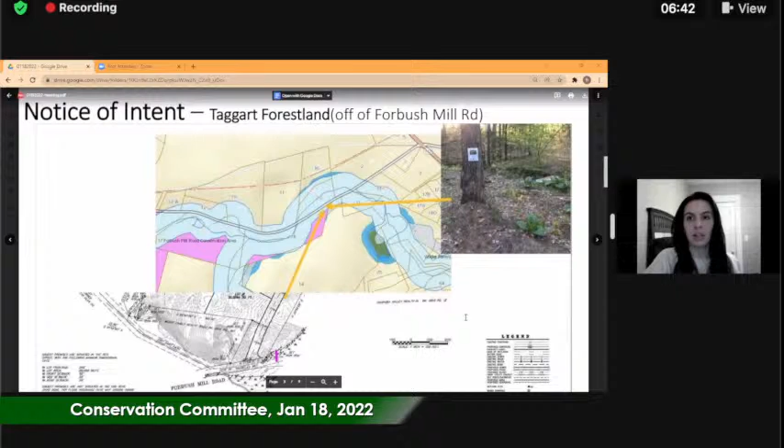Rebecca, do you want to give us a quick overview or reminder of this? Sure. So this is the property that the town had recently acquired. Currently, there is technically not an access through the frontage aside from up a very steep slope. So rather than going up the frontage here, at Taggart, there is this lower area that does cross bordering vegetated wetland, but it's a much more gradual route. There's actually an existing cart path on the opposite side that connects to the loop trail, which is an existing cart path, or it's not a loop trail yet.

This access here is shown in this image. This is what exists. This sign has actually been removed. And as you can see, there is obviously skunk cabbage and some additional wetland vegetation in here.

It's almost like a formed gully from drainage along the roadway. It's across the road from the perennial stream, so we're in that outer riparian area. This board was put here very temporarily for the ribbon cutting ceremony to access into the Taggart property.

That obviously needs to be replaced with something that is acceptable and permitted. The proposal currently is to replace that with one of our footbridges that we typically see on other conservation parcels. In addition, in this proposal we are also looking to...

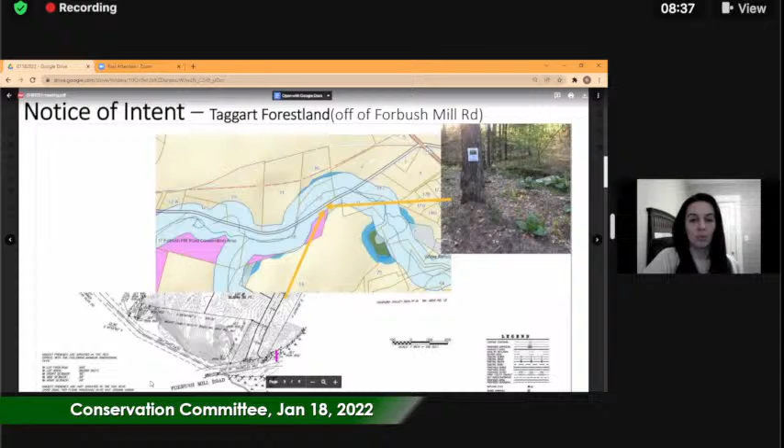I'm sorry, that just disappeared on me. We are also looking to put in 2 gravel parking spaces if 2 will fit, otherwise it will just be 1. And this is just some light grading along the road shoulder there.

I'm just trying to pull this up again. But I did speak to the DPW director. He does not see this as an issue because there's already some riprap and gravel along the side of the road shoulder just before that skunk cabbage. I'm going to share my screen again.

So here where this pink line is, you can see that's actually where the crossing is. So it crosses that bordering vegetated wetland. This parcel here is the existing single family home. And this, where it shows a roadway or subdivision roadway going in, that's actually right next to the very steep slope and was from a prior proposal for this parcel before the town acquired it.

But this was just for the purposes of showing the topography, the wetland resource areas, where this is leading into the property. It's a conservation property for passive recreation purposes, and to access that use, it may be considered a limited project, or the commission has the ability to view it as a minor project.

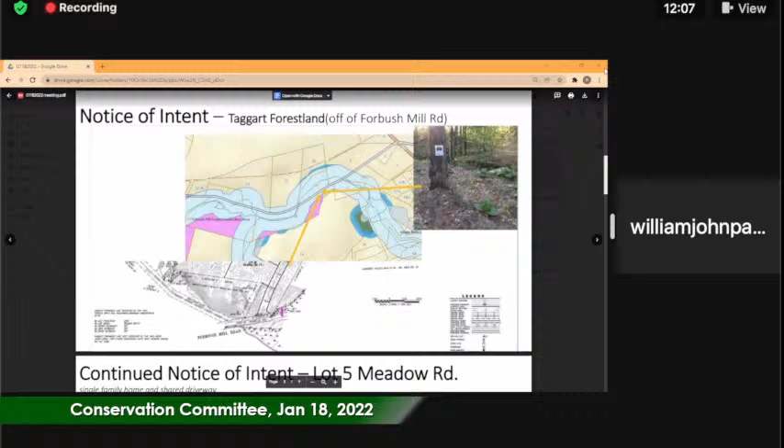Yeah, no issues. Good to see that there will be some parking, I think, to keep people off the shoulder. It's already a precarious road, so that's good that people will be able to park off the road. That's a good point.

And as a reminder too, this is partially to accommodate some of the land grant requirements, which needs to have access along the frontage there. But as we discussed in prior meetings, we are also working on a longer route that will start along the frontage and connect to the Forbush Mill Fields, where obviously there's off-street parking there.

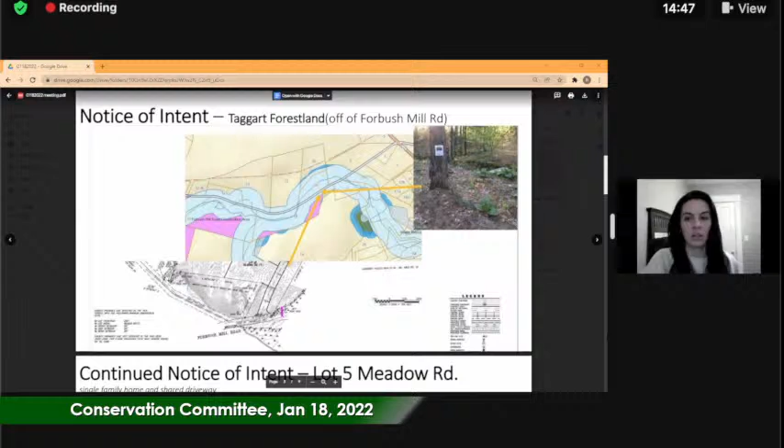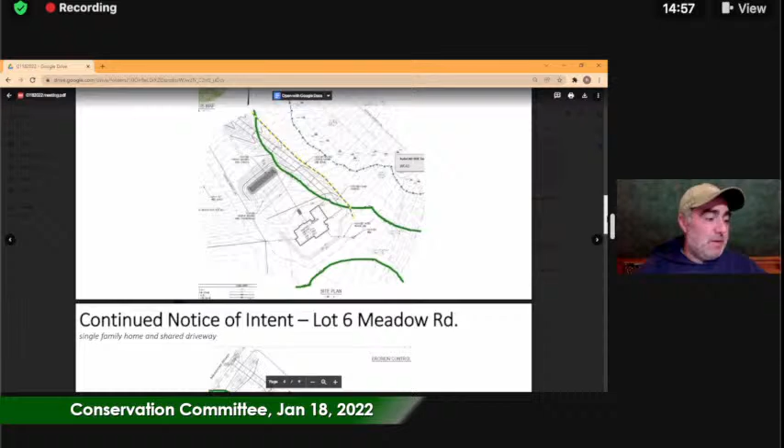I should mention, correct me if I'm wrong, Rebecca, that if anybody's waiting to discuss lot 5 or lot 6 on Meadow Road, starting at 7:30, I believe the applicant has requested a continuation as they're still waiting for a DEP file number. That said, we will probably just continue the hearing tonight and not take comment on it. So if anyone was waiting specifically for those, it seems like those will be continued until our February 1st meeting.

Rebecca, does it look like anybody is in the waiting room for the request for release of funds for 147 Long Hill Road? Yes, Maureen has joined us. Maureen, would you be willing to give an update now? We can take this at any point in time, and we're at an open spot in the schedule.

Maybe she stepped away. Let's see if we can unmute her. I did ask to unmute, so that notification will definitely show up. She may have. Okay, well, we can hold off on that one too.

We have a few minutes before we're going to have actually a little bit of time before we can open a few different things. One thing I will say is for the next meeting on February 1st, I believe 7:30 is the first opening.

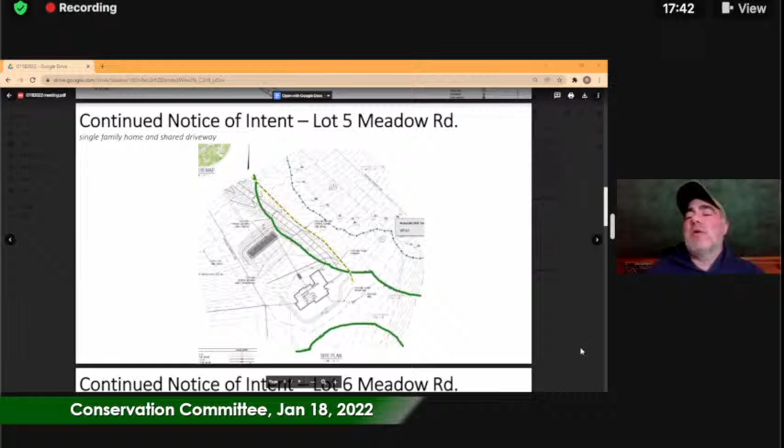Maureen, if you are able to hear me and you're willing to, are you able to discuss 147 Long Hill Road at this point? We cannot hear you yet. You're unmuted though. Oh, there you go. I'm here. Okay. Maureen, did you want to just give us a quick update on what we're looking for tonight, or what the request is this evening for 147 Long Hill Road?

Correct, I'm sorry, for 147 Long Hill Road. Yes, so essentially a bond was posted by the applicant, approximately a $30,000 bond. As the commission recalls, they voted to issue a partial certificate of compliance to monitor the 10 additional plants that we put in for the next 2 years. So we are requesting to have a portion of that bond returned. I think we're allowing about $1,500 to be still set aside in case those plants do fail. So we'd just like the commission to consider this request this evening.

Any commission members have questions or comments? Rebecca, do you have any questions or comments regarding this one? Sure, I think it is a valid request in general.

After I reviewed the order of conditions under the pre-construction conditions, section 5 of the bylaw order, it breaks down the collection of funds, and Maureen's correct. There was $31,559.25 deposited to the town to be held as an escrow for the replication of bordering vegetated wetlands and restoration of the adjacent upland resource area and the maintenance replacement of these restoration areas. And then, of course, it always talks about transfer of ownership, and then the failure to assign rights and responsibilities when ownership is transferred.

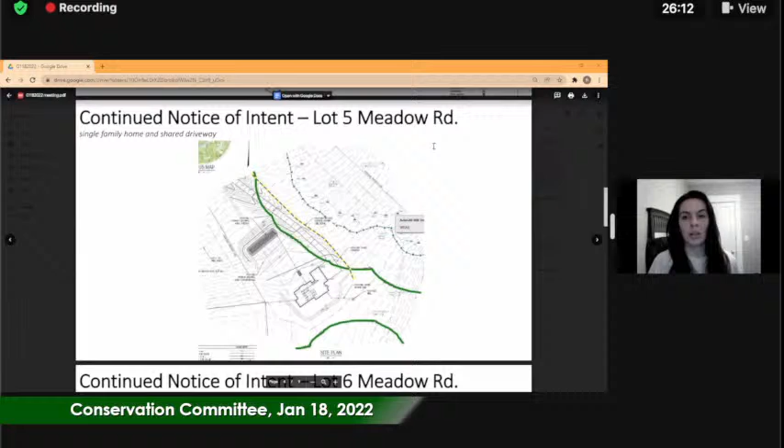I will say that two commission members and myself, along with the site manager and two of the engineers, conducted a site visit, and it, as usual, makes things very clear on site. I did not have any additional questions on site.

They had staked out the center line of the driveway, the septic area. They expressed the limit of work and the limit of grading. Same thing with the house location and associated infrastructure. So I don't know if any of the other commission members wanted to express if they had concerns while on site or not.

No, the one thing I was going to say is last time there was a question about the filtration systems down by the street and that they weren't functioning as well, from the other driveway that's similar to what this one's proposed as. Is there any update on that, Rebecca? Did we hear anything back regarding that?

Yes, I had reached out to the DPW director, and I would encourage individuals who are concerned about that to reach out to him if they have further questions. But when he reviewed the site, he reviewed the plans as well, just to make sure, and when he was on site, he did not see any substantial issues. There was not an icing in the roadway at that time that was being contributed by or sourced from the driveway.

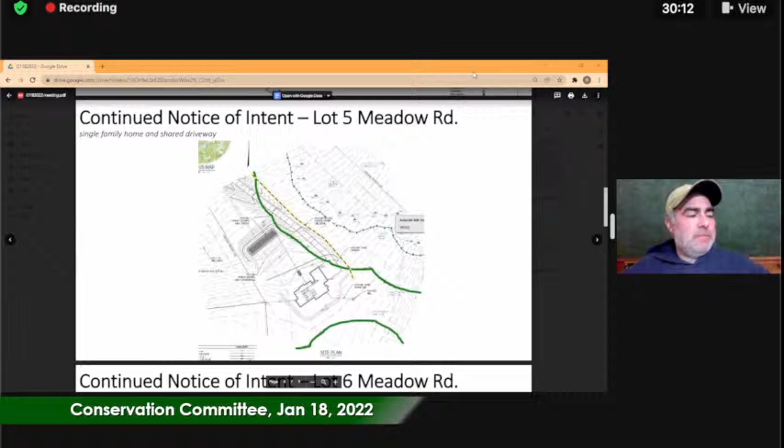Okay, so that said, I'm going to make a motion that we continue the public hearing for Lot 5 Meadow Road until our next public meeting, Tuesday, February 1st at 7:30 p.m. Do I hear a second for continuing? Second. All right, all those in favor, starting with Bill, Aye. Jillian, Aye. And Rebecca, I am an aye as well.

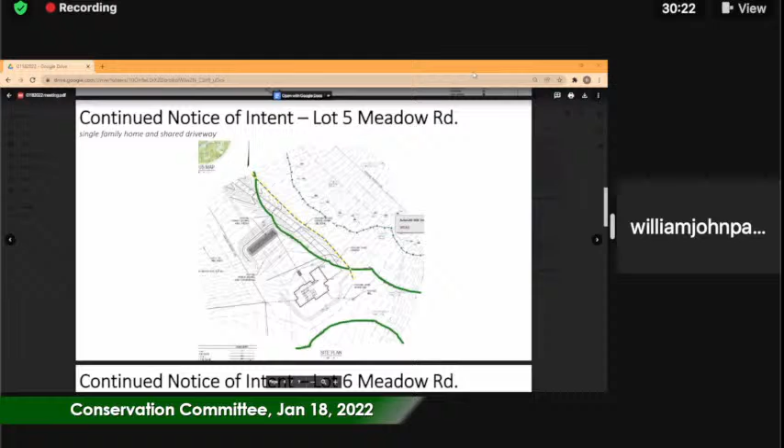Wonderful, thank you. And along those same lines, the Bolton Conservation Commission will now continue the open public hearing, under Mass General Law Chapter 131, Section 40, and under the Bolton Bylaw Chapter 233, to consider a notice of intent filed for Lot 6 Meadow Road, the new construction of a residential driveway and a 5-bedroom dwelling. Proposed site layout of the house and septic will require grading within the 100-foot buffer area, adjacent upland resource area, and the 100-foot vernal pool habitat.

Rebecca, is there an update on this? Quite literally the same. As we know, it's the shared driveway. So the applicant has requested a continuation until the next meeting, as this has not received a DEP file number either. And Bill, I will share your question relative to both lots.

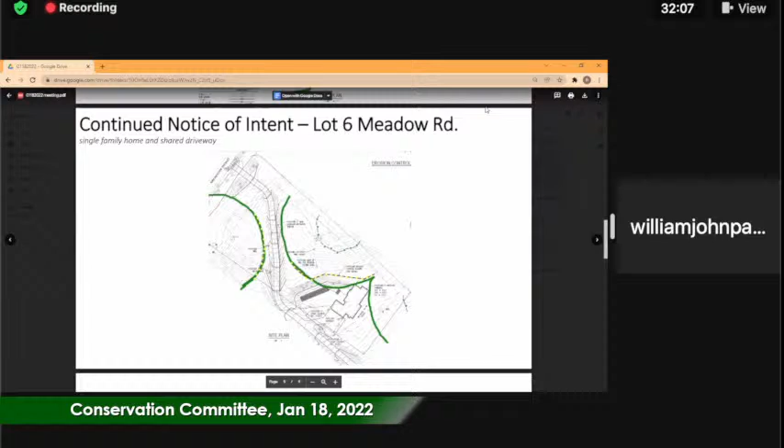All right, any other initial comments on Lot 6 right now? So I'd like to make a motion that we continue the public hearing for Lot 6 Meadow Road until our next public meeting, Tuesday, February 1st at 7:40 p.m. Do I hear a second for continuing? I second, Brian. All right, all those in favor, starting with Bill. Aye. All right, Jillian, Aye. Rebecca, I am an aye as well.

Wonderful, thank you. We haven't seen anybody show up for 711/13 Main Street. I have not, but I did notice an abutter for the Long Hill Road common driveway is on. So I'm just going to provide a brief summary if that's okay, Mr. Chair. That would be fantastic.

Thank you. Okay, Maureen Harold of Norse Environmental was on the call earlier. Because it's not a public hearing, it can be taken out of order. So we did take that out of order since we had some continued hearings, as you're hearing now.

The commission voted to release half of the funds as is laid out in the order of conditions, and the partial COC was issued. We did bring up that there is additional silt fence and erosion controls that need to be removed from the restoration and replication area to be in compliance as the partial COC required. And in addition to that, when the full COC is issued and the complete certification, at that time, the commission would then consider the release of the additional and the remainder of the funds.

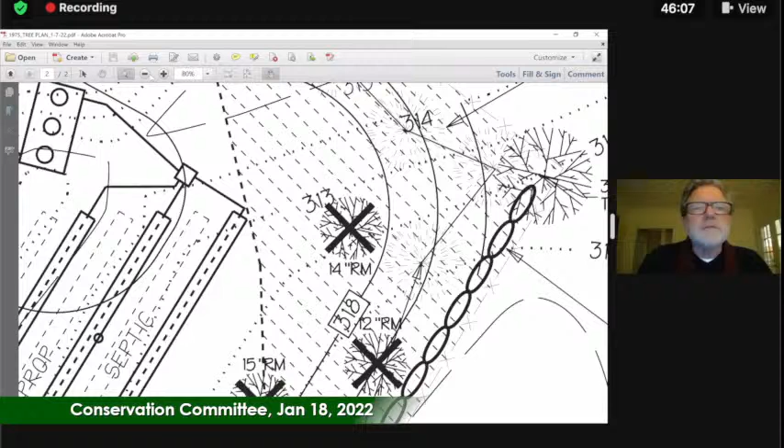That shouldn't need to be removed for construction, sort of along the edge of the work. Similarly, up here, there's a 15-inch red maple that was right at the toe of the slope at the periphery of the work that won't need to be removed.

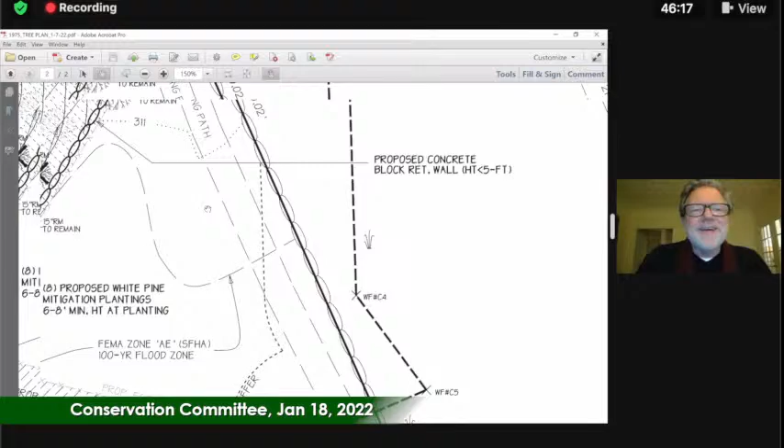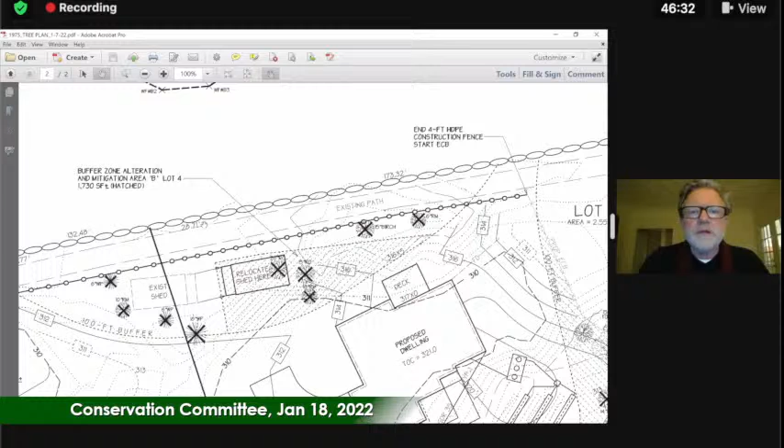And then at the rear of lot 4, there's buffer zone associated with the BVW off-site on the Boy Scout land. This wetland here, this is the stone wall property line, and this is the rear of lot 4. So we've got a shed that's being relocated from where it's on the property line onto lot 4 to conform to setback.

We also picked up the trees that are within the buffer zone to that wetland offsite in that area. So this area here is the area at the rear of lot 4. It's in the buffer zone to that offsite wetland. So we picked up the trees there and showed the ones to be removed.

Those need to be removed for relocation of the shed, as well as for regrading of this area which is very undulating and kind of disturbed, not very smooth grade-wise. So we're just going to clean up the grading in that area to match the cart path that runs along the stone wall, rather than have steep embankment type slopes along the back of this lot.

And we added a few of the trees in the vicinity of where the existing shed is now, that were also proposed to be removed. One's very close to the 100-foot buffer, and there are a few smaller trees immediately around the shed that were proposed to be removed. This is really just to do a full inventory of all the trees within the buffer zone and their disposition, whether we're proposing to remove them or not.

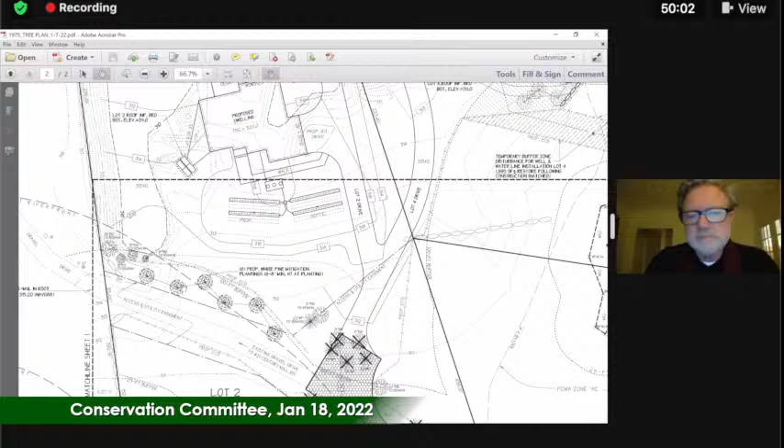That's really the extent of the plan revisions. Okay.

Any commission members have initial questions or thoughts based on what we just saw or heard?

Let's see. Rebecca, did you have any additional thoughts or comments?

I did not get the chance to read through the mitigation plantings and the expression of that. We also haven't carried out our site visit, but once I read through that, I think I'll be able to email the applicant and let the commission know if I still have questions, because they may just be addressed through that document.

Additionally, I know our tree warden did communicate to the applicant that he should be submitting his written statement. And I know the applicant had reached out with some availability, trying to coordinate a site visit over the next week or two.

So if the commission knows of any days within the next two weeks that they are definitely not available for a site visit, I think that would be constructive to state during this meeting. Otherwise, you can communicate it to me individually via email. I've suggested to the applicant that either early mornings or later afternoons before sunset have typically worked in the past, so just be aware of that.

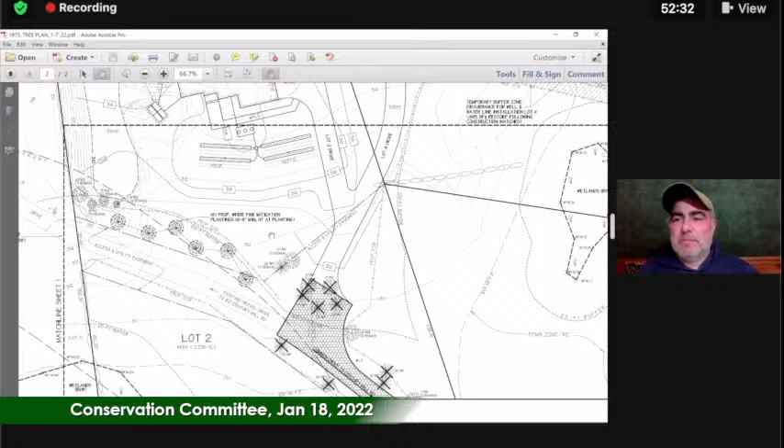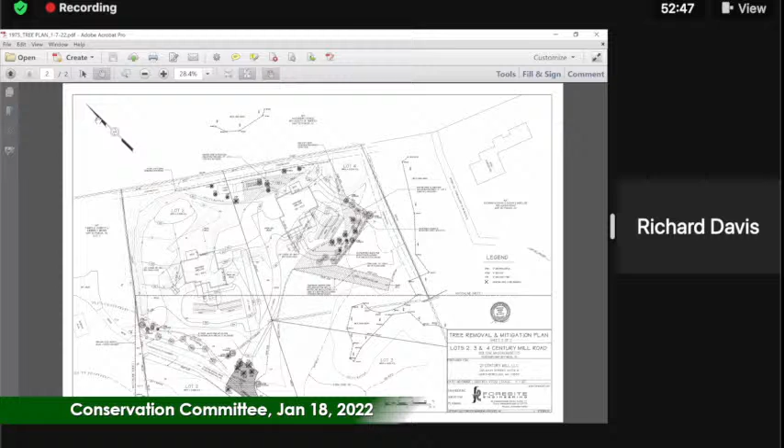Okay, can we look at the proposed permeable driveway, please? The whole of it. And if you could zoom in, just on the permeable driveway, not the whole plan. There are lots of red maples there that are not marked, yet they sit just adjacent to the proposed driveway, and they've got pretty good diameters.

I went to the United States Forest Service, Department of Agriculture, and their rule of thumb for the critical root zone is 1.5 feet for every inch of diameter of the tree. Do I have this right? So if we've got a 10-inch tree, that's 10.5 feet. Or is it 15?

No, it's 15 feet. Well, certainly a lot of those red maples are within 15 feet, much closer than 15 feet. I would think their critical root zone would be adversely affected. So I'm kind of curious why those aren't noted here, or are just, in a sense, not even being discussed.

The other thing is, Rachel mentioned that there's going to be no regrading, yet Scott used the term smoothing with regard to the trees on the north edge of lot 4. Those are his words, not mine. Smoothing to me means, as he said, there's kind of a drop in the topography. You can look at the topo lines and see it. So clearly the intent is to smooth out between the swale of soil around the house over to the old cart path. That's substantial regrading in that particular section.

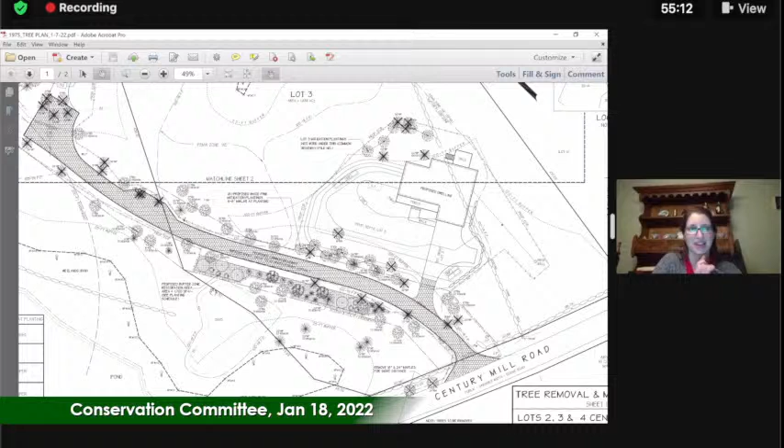Mr. Chair, clarify? Yeah, please. I was not saying that nothing was being proposed. I was saying that there were no changes from the prior original plan. The trees were now just being shown to make sure it was all clear. I wasn't saying nothing's being done, that they're just removing trees for no reason. Since the prior changes, nothing has changed other than adding the tree information. Does that make sense, Richard?

If that's what we're saying is on the drawing, but we just heard Scott say they're taking those trees out to facilitate smoothing, okay? That was part of the original plan that was submitted, and that's exactly what Rachel was just clarifying. This is that same plan, just with another page added to make it less busy. The contours and proposed grading are the same as what we've seen and described in previous plans. So this plan differs by just showing that tree removal.

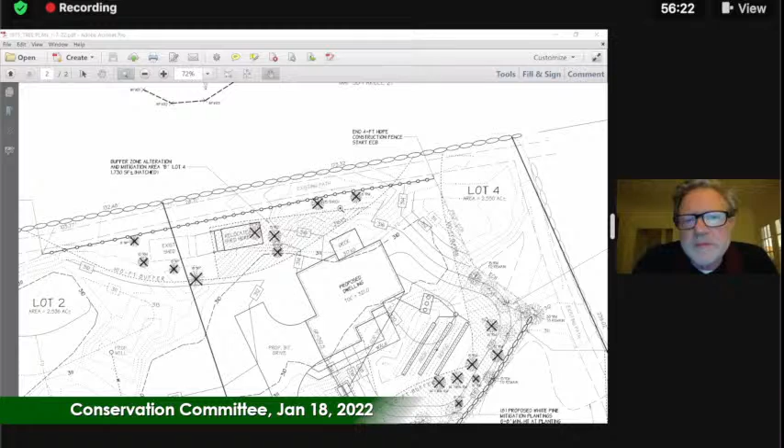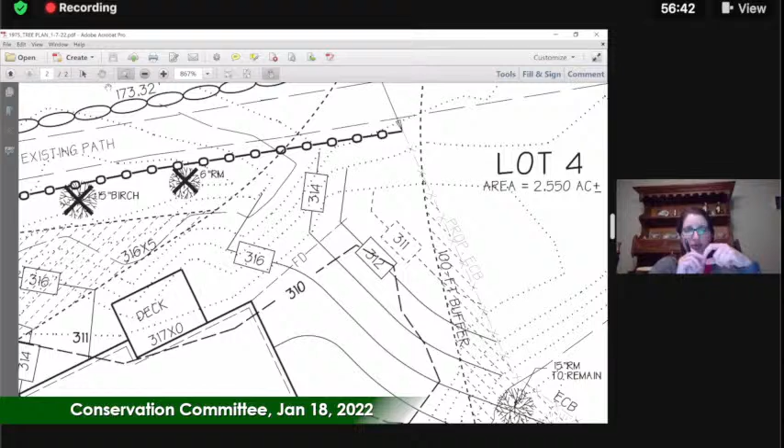I understand. So the smoothing is not indicated in this drawing. No, it is. The proposed grading is shown on lot 4 as it was in prior versions of the plan. All that's been added is the trees being removed in that area to facilitate that grade. But so what I'm saying is the smoothing is not indicated in this drawing. That's not correct. If I may, when you look at the plan Scott has shown, once it's zoomed out, there are areas with a box around an elevation. That is where the grade is to be changed, that smoothing he describes.

Yeah, so that is showing the change. So what you're saying is the topo lines that I see here to the north of that proposed dwelling are in fact what it's going to be.

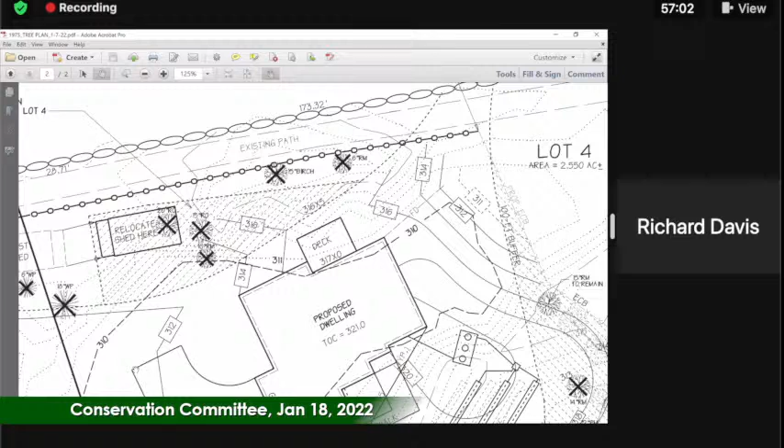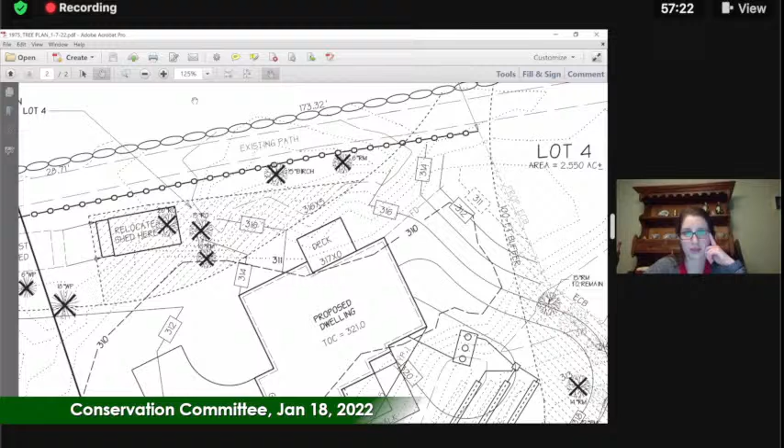Yes. So the way topo lines are shown generally is: the dotted line is topo that exists, and the filled in, solid line is what's proposed.

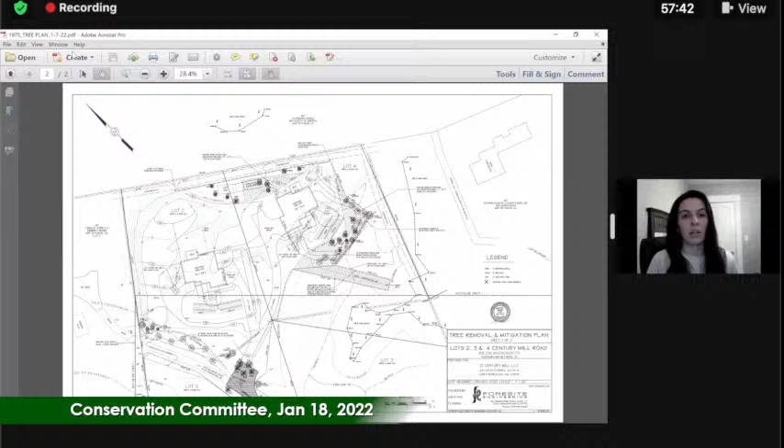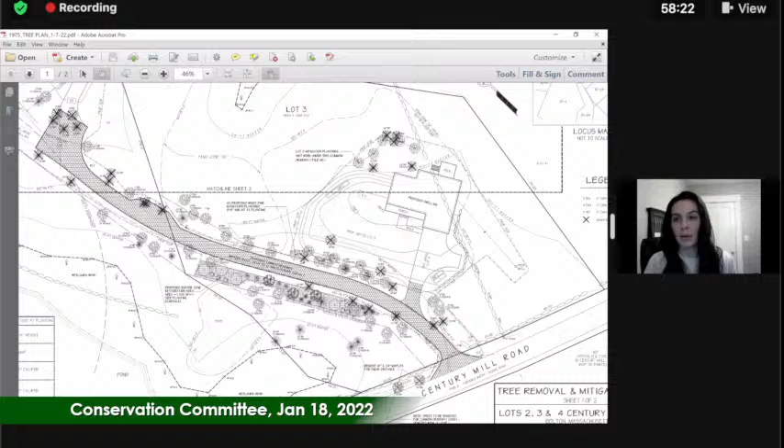If we could maybe circle back to the trees along the driveway. I know at the last meeting Dean had already addressed in some detail the critical root zone and the comparison, but more importantly what had also been relayed was alterations to that critical root zone and what a tree can survive and what would cause its imminent death, essentially, I'm paraphrasing. But Dean, if you don't mind, could you briefly summarize for Mr. Chair? Otherwise, if you're comfortable with what was stated at the last meeting, I can refer to those minutes, which should be online as well. If you're able to do a quick summary that would be fantastic, nothing too detailed, just what we discussed last time.

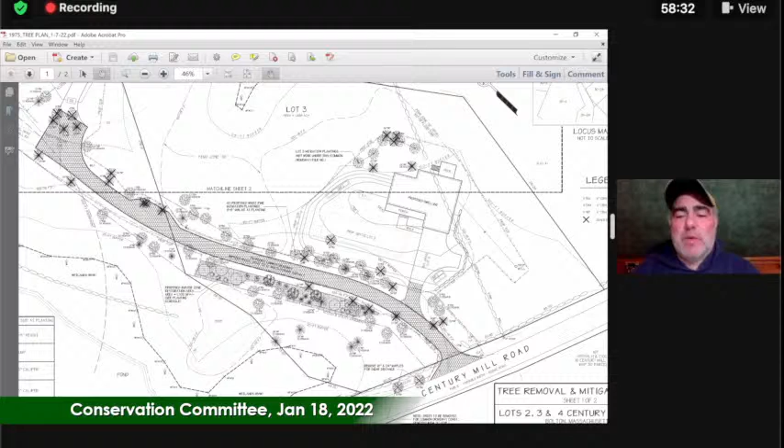Great, yes. So various authorities have different definitions of critical root zone. The 1 inch to 1.5 feet that was just cited is a little beyond what I've seen in the past; typically it's 1 inch to 1 foot. But the important thing to keep in mind is that with these trees right along the edge of the driveway, the red maples specifically, there's going to be some root disturbance along one side of the critical root zone. But the entire back area, probably 75% of the root zone of the trees, will not be impacted at all, barring anything unusual, and it's certainly important to keep control of the construction process.

Red maple responds fairly well to root disturbance, so I'm not particularly concerned. I did walk the site after this newest plan was in development, and I didn't see anything of particular concern. Yes, the trees will be impacted, but I don't feel there's any need for excessive concern that a lot of those are going to die afterwards. I'm pretty comfortable with the plan the way it is.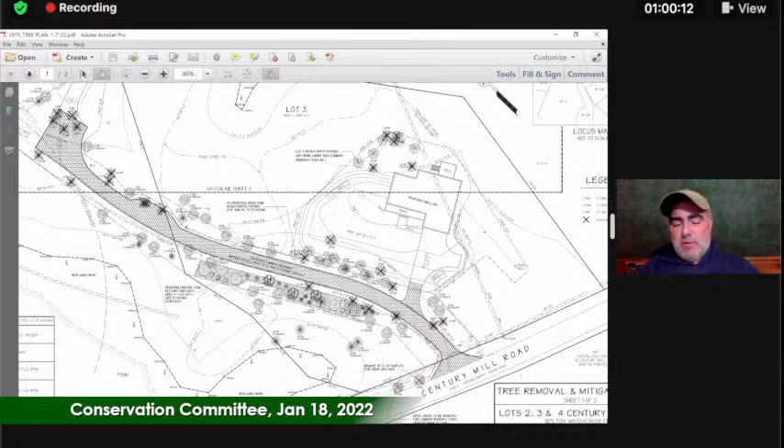Well, unless I was to go out there and measure every tree and do the math on each one, then I would specifically know. I'm not trying to cause a problem with Dean, but I went over there and walked the driveway too, and it just seems to me that there are a lot of trees very close to the drive, and it's kind of hard for me to imagine them surviving this type of excavation.

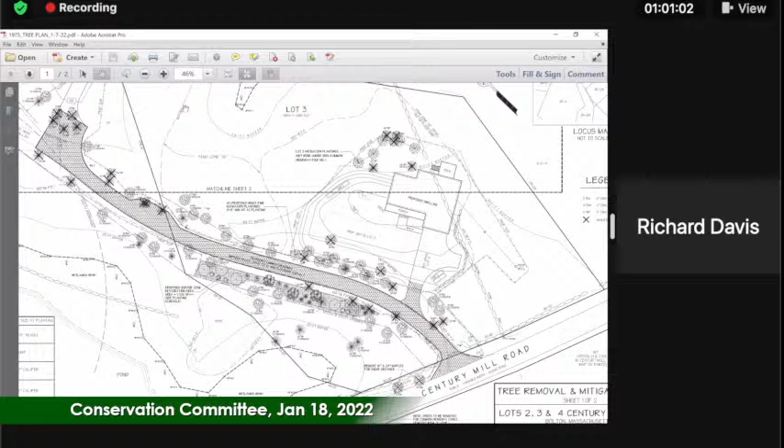I did have one other question. To the south of the dwelling on lot 4, south of the proposed leach field, some white pines are being removed. Why are they being removed? Is it just to make more of a meadow there for the benefit of the homeowner? Let me make sure I'm looking at the right lot. Okay, this is lot 4, and you can see to the south and east there are quite a few trees that are going to come out there, and I'm just curious why.

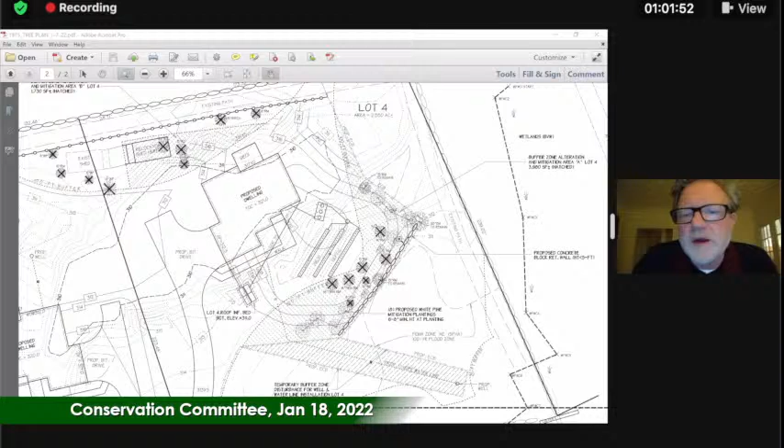I'm wondering if Scott or Rachel could answer that. I'm wondering if it has to do with septic. So, due to proximity to the septic system, the grade is being altered substantially there. There's quite a bit of fill, and those trees wouldn't survive placement of that much fill in that area. This is probably about 4-plus feet of fill through here, and these are in the breakout slope, just not likely to survive more than 2 feet of filling around them. So we're proposing to remove them when the area is regraded.

Rich, do you have any additional questions? I'm wondering what's going to happen with all the water that normally went into that depression, now that it's going to be coming onto my property, given the fact that that's all being raised. But I suppose that's an issue for another day.

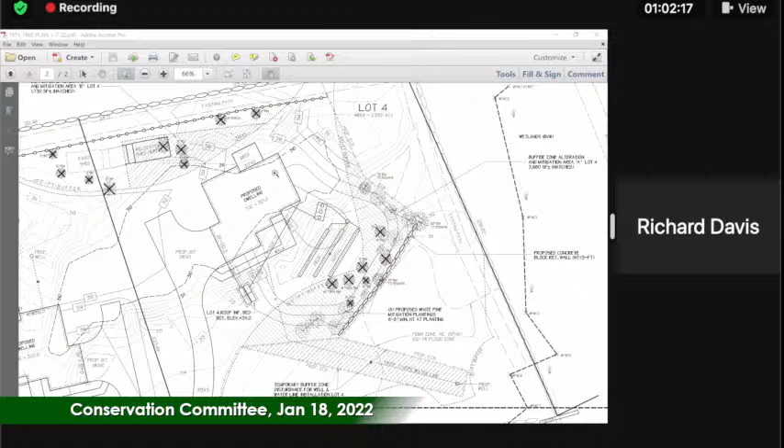You follow me? I do, and I think it should have been designed to avoid flooding on your property. I believe that's what they're saying - the design will accommodate that. That's basically all I can tell you on that one.

Can I request again from the commission members your availability, or dates you are not available, specific to the tree plan before we talk about other aspects of the site? Tuesday is generally not good for me over the next two weeks, but most other days I should be fine, especially with more warning. Late afternoons are usually better for me, but I can switch things around if need be.

Thank you. Rebecca, it's Bill. I'm not around the 27th or the 28th, but I am around all next week. And Jillian?

Yep... I can't hear you, Jillian. Sorry - Friday mornings are generally good. I cannot do the 24th or 25th, or the 31st or the 3rd.

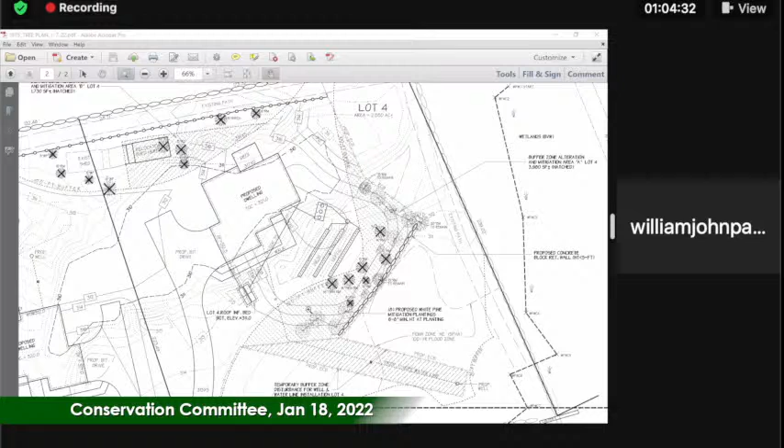Everyone's schedules are filling up, so we're going to try and schedule that as soon as possible before other things are booked out. Bill or Jillian, do either of you prefer a morning or later in the afternoon? No, I don't prefer either. And it depends on the day.

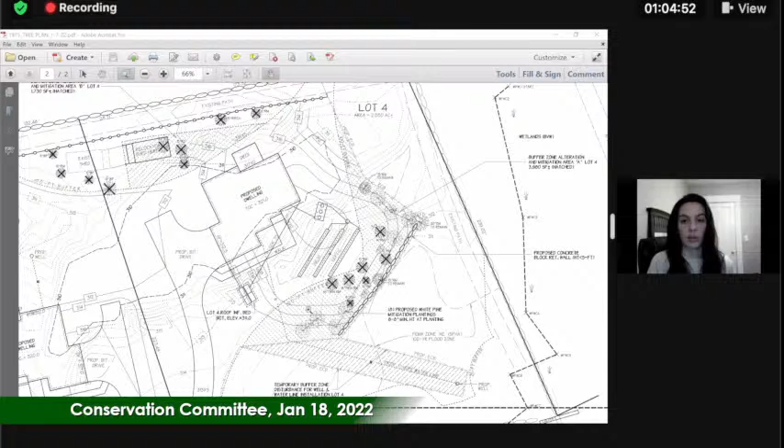Okay, sorry, all right. So I will take what you've stated this evening and email Rachel and our tree warden to try to coordinate a date that works for the primary group. Does that sound reasonable, Rachel?

Yep, I just checked my email and it looks like the tree warden got back to us - he says he's available anytime Monday through Friday during the day for the next two weeks, so we have the ability to work this out and schedule it in. Great, Mr. Chair, I'll hand it back to you.

Thank you. Other questions or comments from members of the public tonight? It sounds like we'll probably be continuing to get us out there for this site visit. I see no more questions or comments from the public.

In that case, Rachel or Scott, is it okay if we continue until our next public hearing? Yeah, we understand there needs to be a continuance to be able to see the site and have the tree warden - I think he said he was going to try to write something up tonight to get to Rebecca tomorrow, so you guys can have something in writing from him. So I understand you'll need time for that.

I do think we've really answered everything that's come up from the commission, at least, and I think Dean's done a great job of going over this critical root zone information.

Okay, in that case, I'm going to make a motion that we continue the public hearing for Century Mill Road, map 3.D, parcel 75, until our next public hearing, Tuesday, February 1st, 2022, at 7:50 p.m. Do I hear a second for continuing?

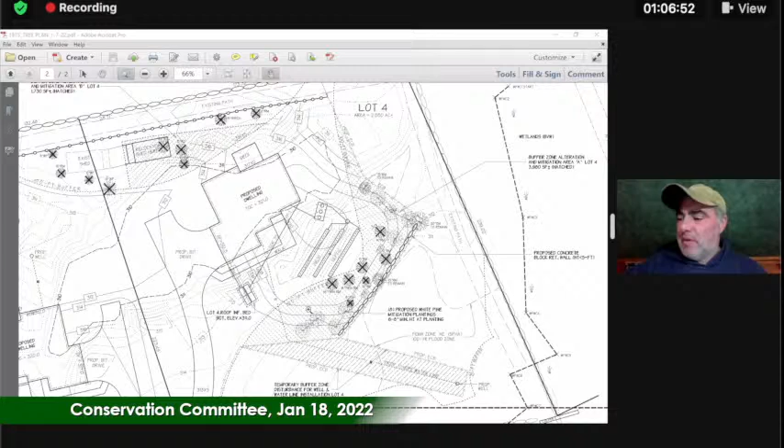I second, Brian. All right, all those in favor, starting with Bill - aye. Jillian - aye. And Rebecca - I'm an aye as well. Wonderful, thank you. Rachel, I will be corresponding with you to coordinate that site visit.

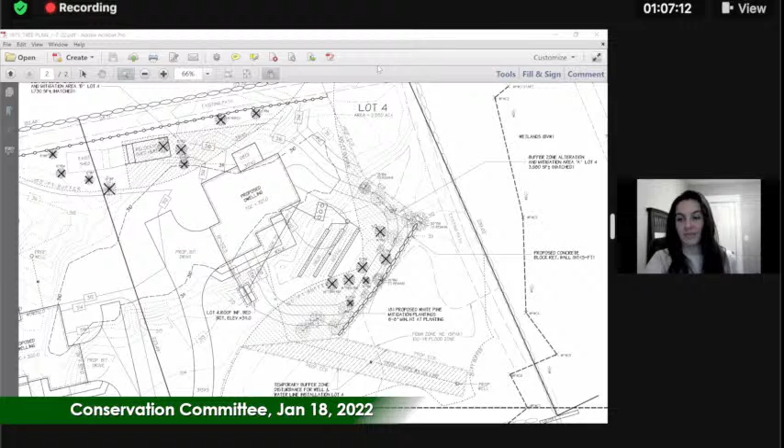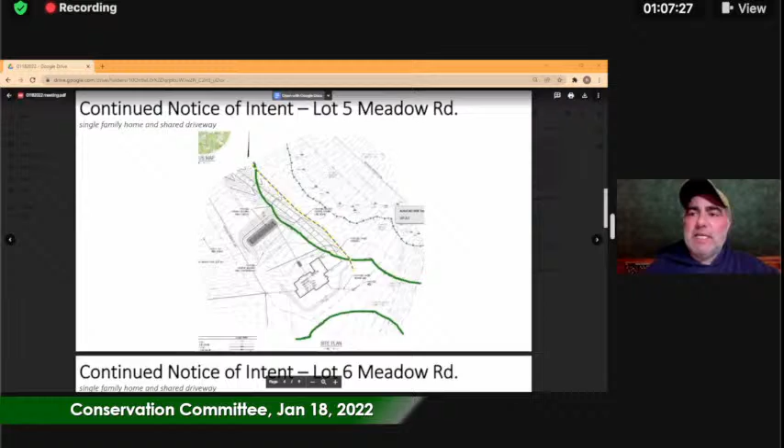All right, Rebecca, does it look like anyone is here for 7-11, 713? I see no one for that particular item. Okay.

Well, it was just an introduction, not an official public hearing, so I see no reason why we can't simply table it until our next meeting. We'll note that and encourage them to be present, or give me an update before the next meeting so I know whether they are coming or not.

Excellent, all right, I think we went through everything else on the agenda. I will ask again if any commission members have any new business or funny stories they want to share.